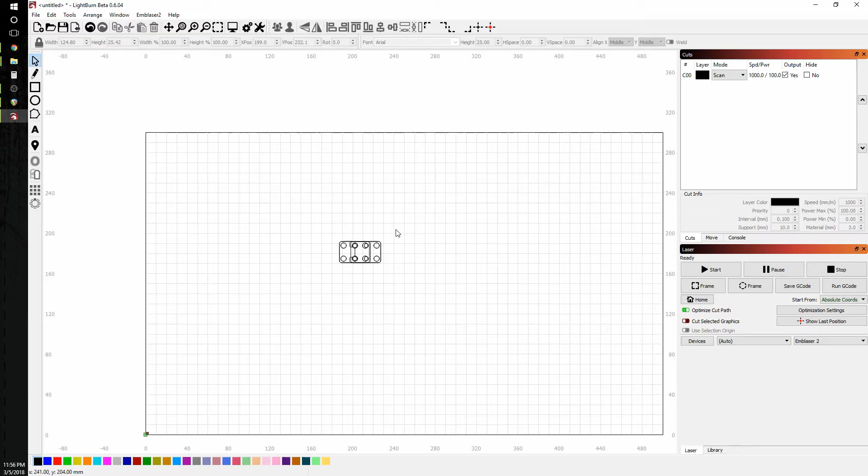Now, the first thing we need to notice is all three of these files came in on top of each other. That's because LightBurn imports from the origin. So if all three of these were drawn with 0, 0 at the center of these, which is how they were drawn, they're all going to import on top of each other.

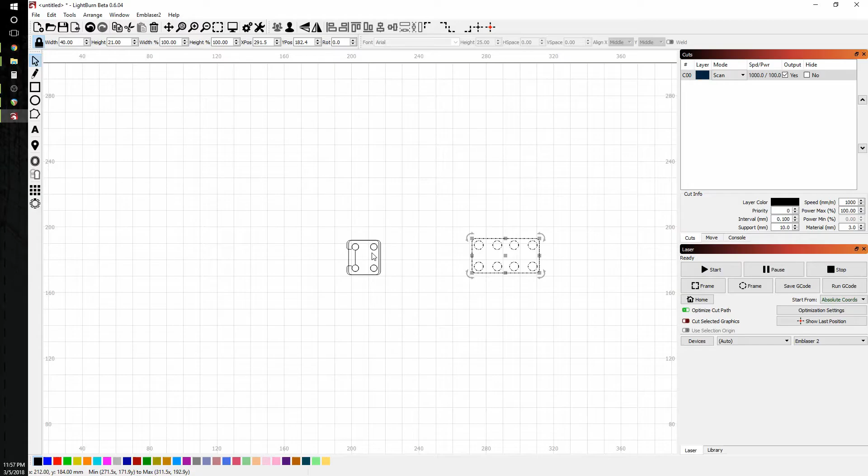So to select them, I'm just going to select anywhere in the biggest drawing because that's the easiest. And because of the way LightBurn imports files with all of the geometry in that file completely grouped, it makes it very easy to initially select and navigate them. Notice these two actually have holes right on top of each other. So if these weren't grouped fully, grabbing these and having everything come with it might be very difficult depending on how the drawing was done.

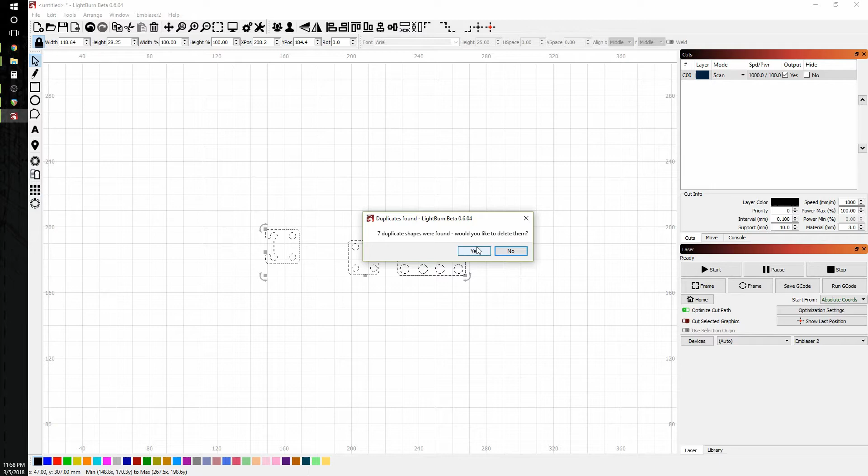So the first thing I like to do when I bring in DXFs, especially DXFs that were created in Autodesk Fusion 360, is I like to highlight them all by hitting Control-A and go into the Edit menu and click Delete Duplicates. And this is because for some reason when you use the Save DXF file in the Sketch menu in Fusion, it makes duplicates of certain pieces of geometry. And this is the quickest, easiest way to make sure you avoid double cuts in your drawings.

So I'm going to go ahead and click Yes. And notice all of my geometry is still there. It just got rid of the duplicates. So now I can go about selecting my drawing and placing things the way I want them to be cut. Now we can do that in two ways.

When we click and drag, much like other CAD systems, LightBurn has an enclosing selection box, which is from the left. So we click and drag from the left, and this will only select things that it fully encompasses. So if I fully encompass this one, but only partially encompass this smaller one over here, it will only select the one that the box fully enclosed.

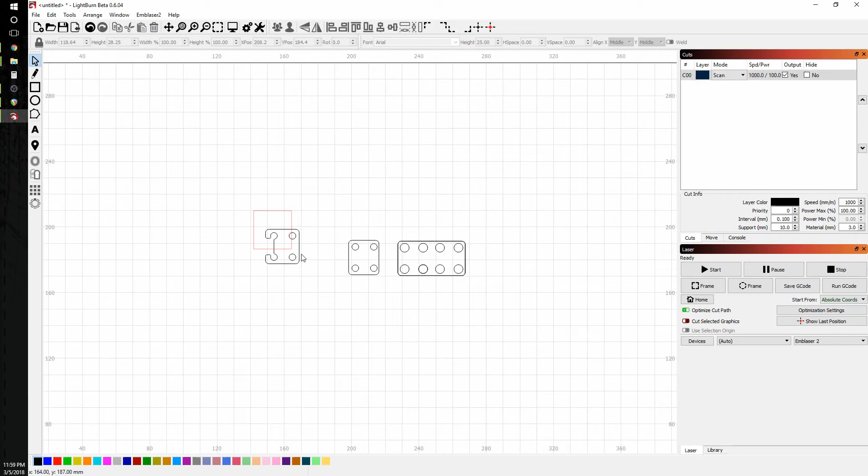Now, if we want it the easy way, we can use what's called a crossing selection box, and that's anytime you drag from the right, and this will select anything that it touches. So when we are selecting all of our geometry, it's really nice to be able to exclude certain parts or include everything very easily. Now, as we're positioning our drawings, there's a number of different ways that we can do this. Let me zoom out and encompass the whole workspace here.

Now, if I wanted this part to be up in the top corner or in the center of my workspace, that's very easily done by using the snaps in the toolbar. And we can move to the upper left, the upper right, lower left, lower right, or dead center. And personally, I find that pretty cool.

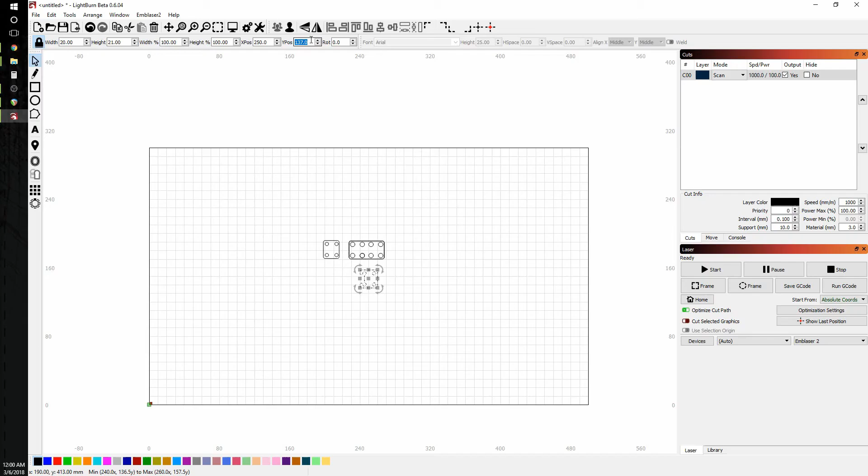The other way to move things around is we can use the X and Y positioning in the toolbar up here. Now we can use the arrows to move things around and just hit enter. Notice it doesn't activate until I actually hit enter. Or we can use the arrows on the keyboard or the mouse scroll wheel as well. All very cool for fine positioning.

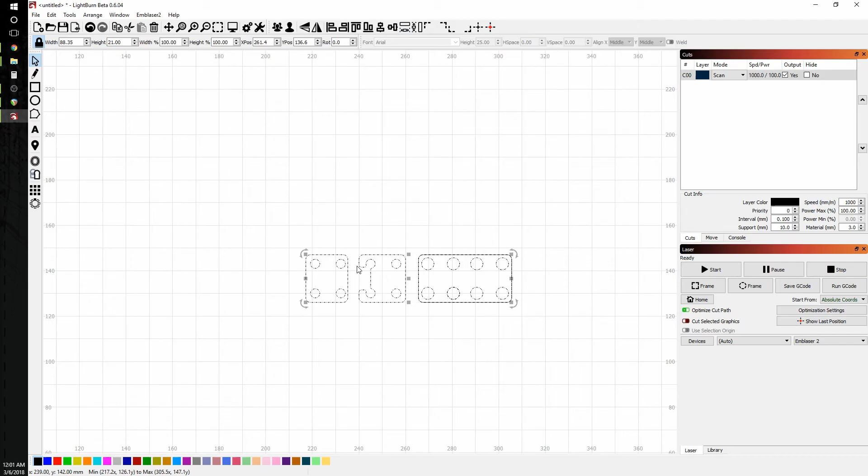The other thing we can do is we can just drag them around. And I'm going to drag these and get them pretty close to where I want them. And for my cut, I want these all perfectly aligned along their centers. Now, the easy way to do this is I can hit Control A and then hit the Align Selected Objects Along Their Horizontal Centers button. Now they're all perfectly aligned and ready to go.

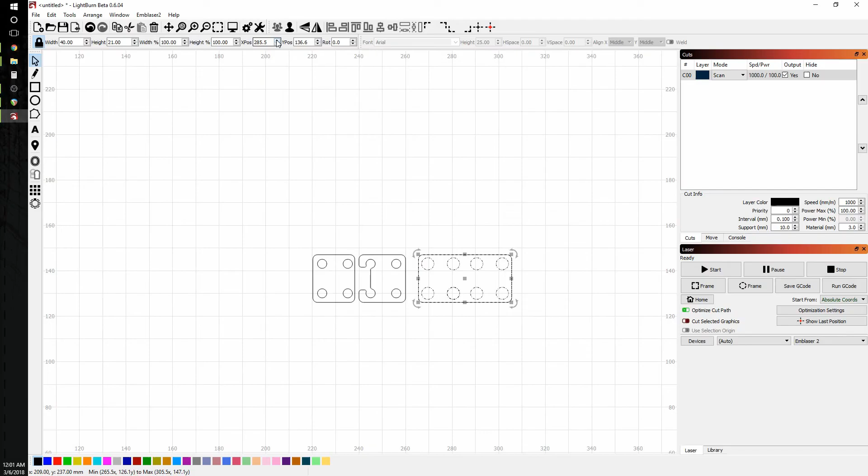But I want to nest these a little closer so I can get the maximum of my material. So I'm going to use the X position and just get it as close as I reasonably can without my lines overlapping so I don't double cut. And that looks pretty good.

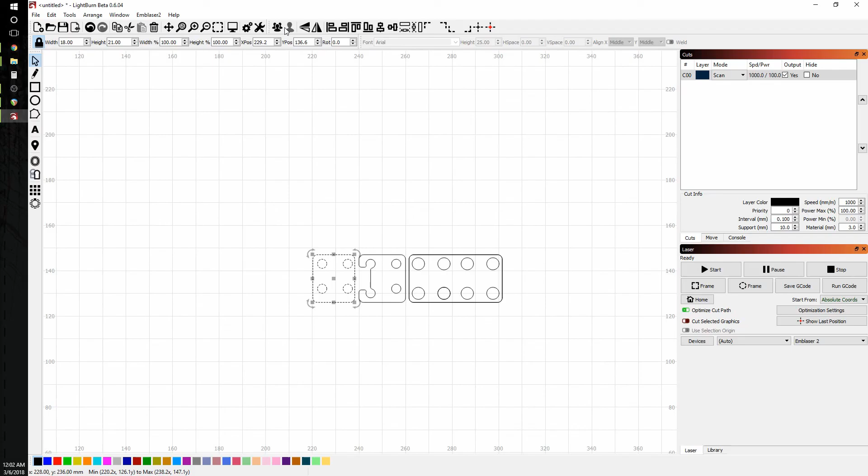So I have everything positioned the way I want it, but now I've decided that I don't necessarily like where these holes lined up. So what I can do is I can highlight both of them, and click Ungroup Selection. And now I've decided I want to move these 3 holes up 2 millimeters. Now I can highlight this one and regroup it. Same for this one.

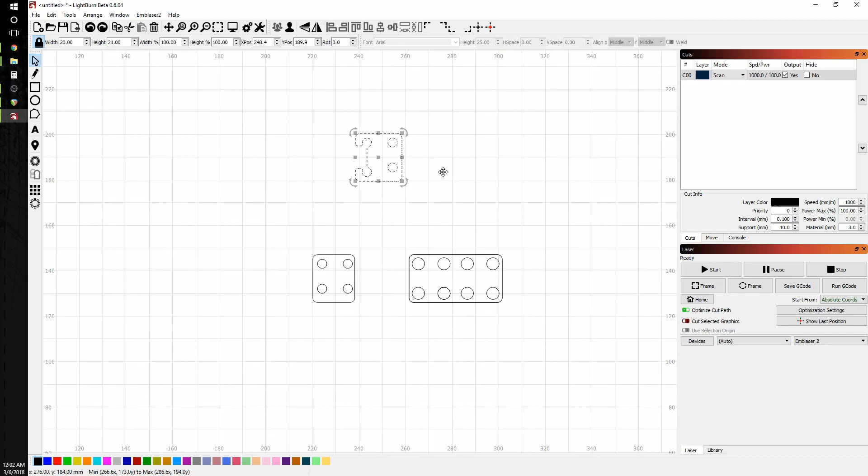Now these are regrouped, and as I drag them around, they are easily repositionable. So this is a really nice way to make quick edits kind of on the fly as you go. So that's it for this first video. We covered importing, how grouping works, selecting, and positioning your work in your workspace.